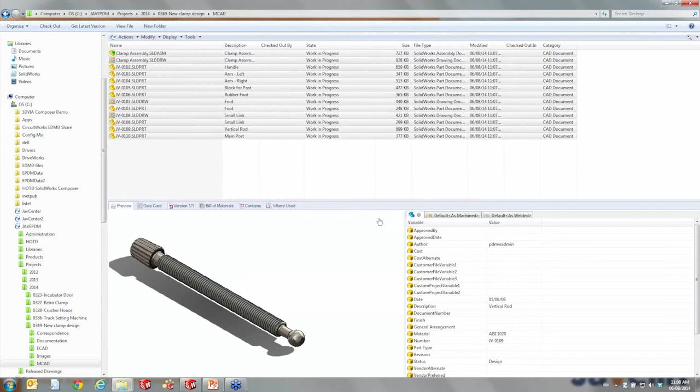Let's go to the next step, which is the problem of accidentally overwriting files. The nice thing about EPDM is it's fully versioned and has a full version revision history. That just allows us to go back in time to any release or any version we may have saved, and it gives us a lot of capability here. Maybe you have design ideas, you want to try different designs, and you want that ability to back up to a previous version and then go down another path. With EPDM that facilitates this. So let's take a quick peek at that as well.

So inside EPDM, we put these files here. Let's say we wanted to try some different designs. So for example, let's take this part, and we'll just check it out to let the system know that I'm working on this. And we'll just open it up in our SolidWorks.

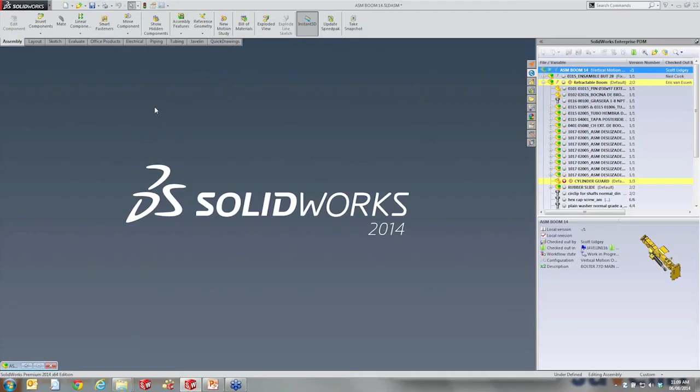Okay, now we're free to design just the way you do today without a PDM system. We'll just start sketching. Maybe we'll go in there and draw a new base on here. We'll just put a square base on that part like that. We save the file up, and then what we can do is tell the system that we've made this change, so we check it into the system. You can do that through Windows like we saw earlier, or you can do it right through your CAD interface, which you see on the right-hand side here.

So again, we'll give it history. We'll give it what we did to the file so that we have accountability and history that we can search on. So here we just changed the base, let's say, and check the file in. Now, if this was a mistake, or we preferred the earlier design, we have that history that we can now go back to. Again, we could do it right through the CAD interface or through Windows.

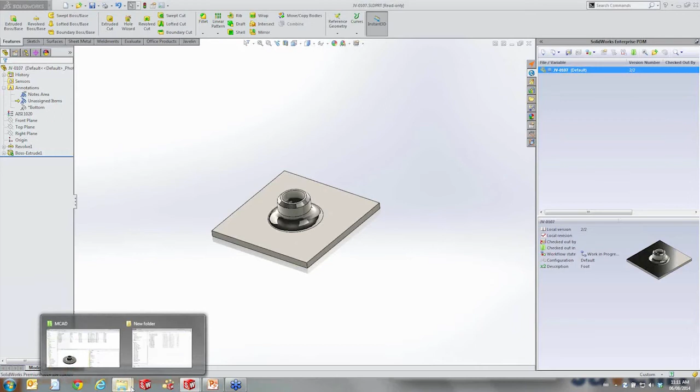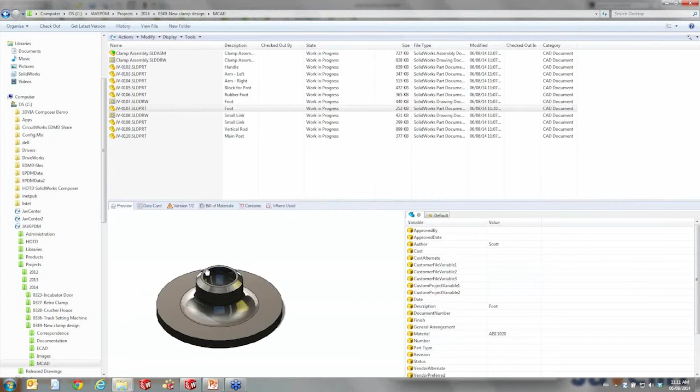So anybody that has access, maybe we'll close this down, we'll do it through the Windows environment. So there's that part file we just changed. But then if we want to go back in time, we've got that full history to be able to access. So maybe we will go to the previous version, version 1, and now you'll see that the preview updates to the older version, and vice versa. If you want to get back up to the latest file, we'll just right-click, get the latest version, and again, we're back up to date.

So going back to the survey question, one of the key things was overwriting each other's files. With this whole check-in and check-out process, it literally makes it impossible to overwrite each other's work. Even if somebody were to check out and save new work, you can always go back to the way somebody else saved it at a previous point in time. So that's a game changer for our customers.

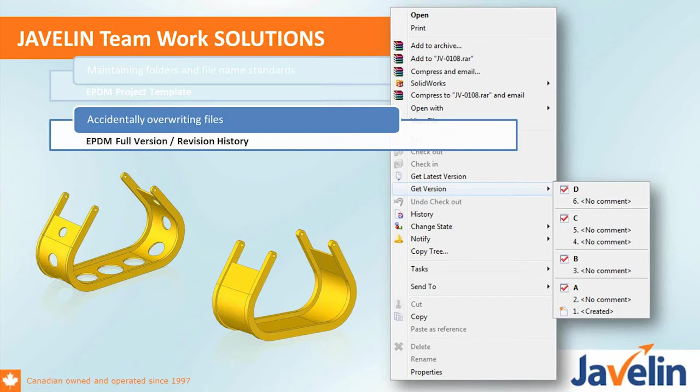Another neat feature is the ability to work on projects as a group. Being able to coordinate this is key, and EPDM is there to facilitate that, with the ability to check in, check out, and control who has the ability to make changes to parts and assemblies as one group.

If we go into our SolidWorks environment, here's a pretty large assembly project that in some companies you might want to work on together as a team. In the right-hand column, that glimpse into the whole project shows who has these files checked out. You'll notice I'm working on the main boom assembly, while Eric is working on the subassembly, and we've got other users like Neil working on another subassembly or a drawing. We can just work on these things together.

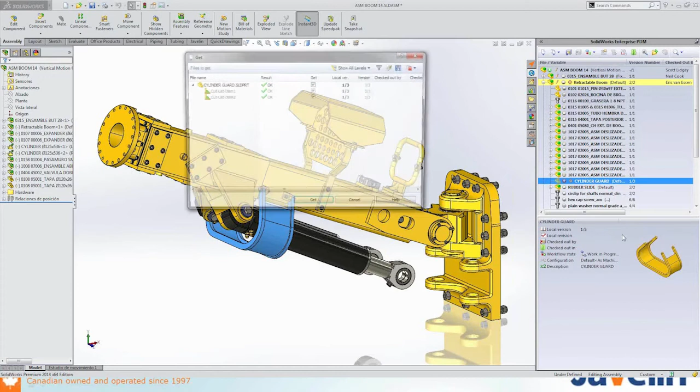As changes occur, you'll be notified. You get some nice highlighting and symbols that let you know about things happening behind the scenes. For example, this cylinder guard has been changed while I've been working on the main assembly. I want to make sure I'm looking at the latest, so I'll just right-click and get the latest version. No need to reload or shut down the file and reopen it—we can just update, and there you see the newest guard is available, and I continue on my way.

So EPDM does a nice job of controlling who has access to the file, and we're eliminating that old issue of having files overwritten accidentally.

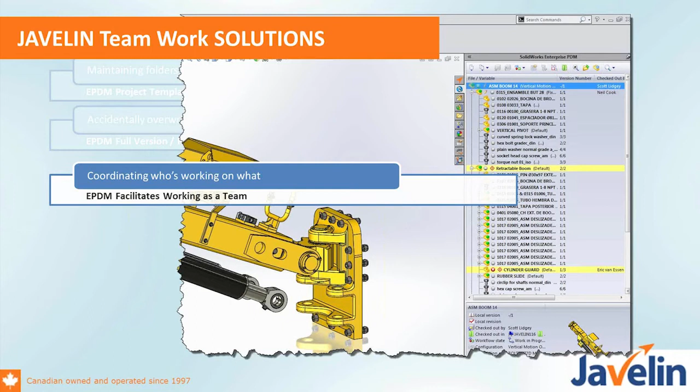Okay, keeping track of who made changes. Let's take a look at how EPDM maintains a full history, accountability, and the ability to report on any of these changes happening to the documents.

Maybe we'll take another project that's a little farther along. For example, you'll notice this drawing—let's take a peek at that. If we look at its history, you'll see all the different versions and all the people who have made changes to these files. We could actually print this out as a nice PDF or printed document, which is more or less a report of what you're seeing here.

Other things you can do just to nail home that history tracking point—if we look at the files we just put in there, let's say I move files around or rename them. That would be a difficult thing without a PDM system. But inside here, if I have the rights to move or rename files, I'm not afraid that the assemblies will be broken or the references lost, because the system manages all that for us in the background.

If I pick on the part and go to where used, it still shows me where that document's being used right now, and it's in that drawing file, which is in that project over here. And the history has been tracked on that. If I look at the history of that file now, you'll see when we put it in, and right here you'll notice a listing that Scott moved it from this location to this folder, and then he renamed it from the original file name to the current one.

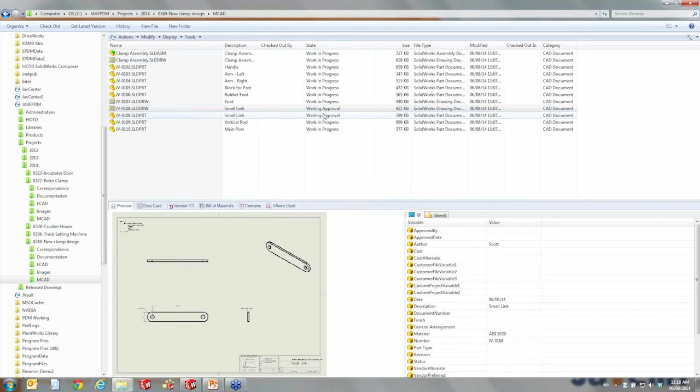So it's been passed off. You'll note the state in my workflow where I'm waiting for approval now. As the designer, I've been sort of locked out—I can no longer check it out or make design changes because my job's done and I've passed the work on to Eric's desk.

So let's see what Eric sees in the background. Let's log off for myself, and while we log back in here, we'll just look at the PowerPoint quickly again.

So I'm logging in as Eric. And that little sound you may have heard—that's the notification system built into EPDM. Let's look at the last topic here, which is seeing what work is on your desk. That's what Eric has heard now, that he's been given work to do, and that ability to get notifications automatically.

We're also going to talk about how we can search on what might be on our desk waiting for us. The notification sound you heard just gives Eric a quick little email message here.

It's really nice because it gives a quick intro to what's needed from him and the latest history comment. What's really cool is the hyperlinking that takes you right down to the history or properties of that file. If we look at the history of that drawing document, you can quickly see it, print it out, or compare drawings. Or you can just link to the folder structure where those files are.

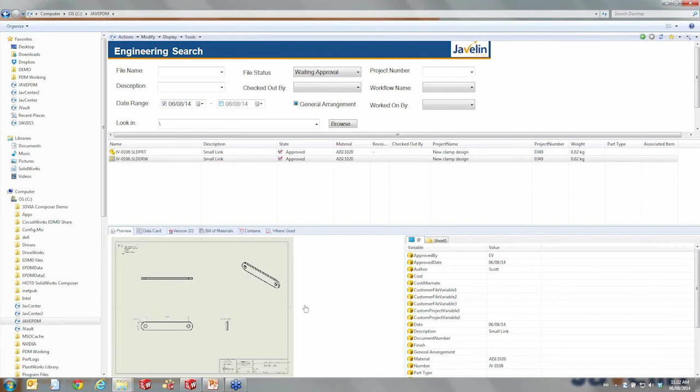I know that a lot of industries consider that password protection a form of electronic signature. We've been working with some medical clients that have written that as their electronic signature, and it's been passed okay. Not every industry has the same requirements, but we're happy to work with you to see what we need to do to get that electronic approval done.

So you can see a lot of nice things happened here. It's actually sitting in an approved state, which is great. And if you actually look in the title block, we've stamped the revision, and Eric's actually signed it off here as well.

And like we saw in the workflow, there's lots of other things that could be happening behind the scenes. I mean, a lot of people like to have a PDF version of their drawing. Well, our system's going in there as they approve drawings, and you'll see there's the 108 drawing from today, and it's been approved and PDF'd into a certain location, maybe for sales, or again, maybe a shop floor location.

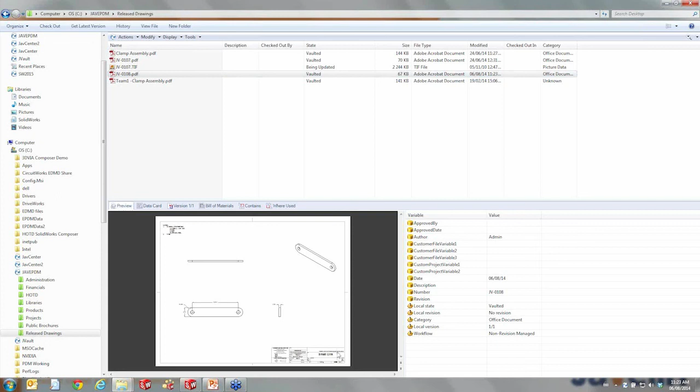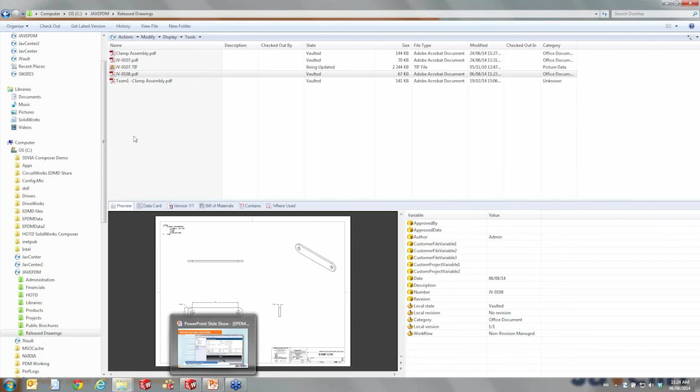Yeah, it's nice to add that automation where possible. In fact, a lot of customers see the value of keeping teams organized, but when it comes down to justifying the investment in getting a system like EPDM, taking tasks off workers' plates, like automation of PDF, is a great way to do the justification. It's like we are literally taking this work away from you, and we're automating it because you have a controlled way to do it. So that was great, Scott.

Anything else, or is that perfect? Great, and we're way ahead of schedule, which is amazing. I'm sure there's lots of things that people need to get back to today. I think I had one slide that I wanted to end off on.

That's just a little bit about a very basic Javelin implementation. We've been working with this system, I think it's around 9 years now coming up on. Before SolidWorks even purchased it, it used to be called another system. We have a strong history with this, and we have a number of application engineers that do implementations. I think we have 4 people that do them quite regularly. Over the years, we're trying our best to fit this solution and streamline it to fit companies of any size. And really, the idea is to be able to offer something that any company can afford and justify.

And the way we've done that is setting up a Javelin standard. So really, the vault that you saw today that Scott did a demo on, there's obviously a lot more to it in the back end, but the nuts and bolts of it, the properties we're working with, data cards, and some basic processes are all part of a standard Javelin offering. Not quite everything you saw there was included, but we talk with you to understand what you get as part of a Javelin implementation. And the way we do that, we can do the installation.